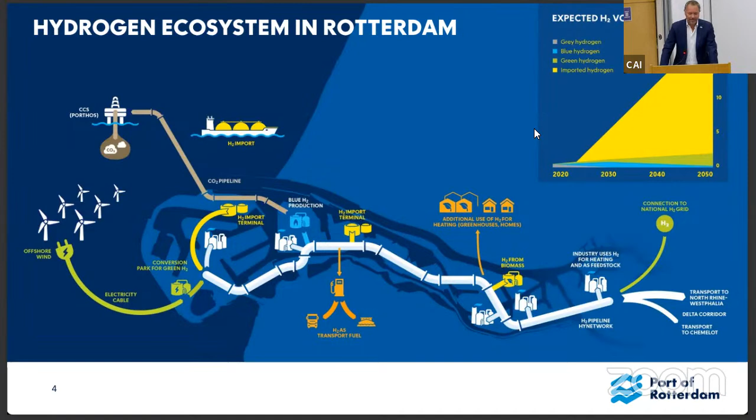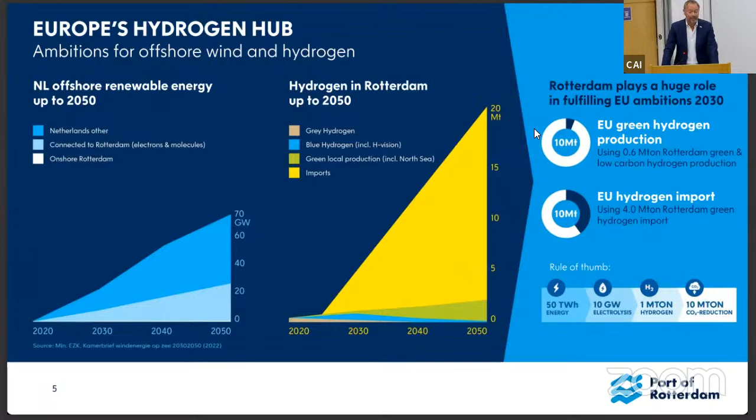Here you see some numbers about that. The EU set a target already that they need 20 million tons of hydrogen in all of the EU in 2030, out of which 10 million tons is imports and 10 million tons is local production. From the local production, with the plans we have, we think we can come up to 0.6 million tons of production of green and blue hydrogen. But for the imports, we think that 4 million tons of hydrogen needs to be imported already in 2030. Next slide, please.

Here you can see this is all fueled by the offshore wind that we have in the North Sea, in the Netherlands. Some of it is already under construction. We plan to have 20 gigawatts of offshore wind parks ready in 2030, out of which 7 gigawatts will land at Rotterdam, at our port, where we simply have extensive grids. Because currently there are also some coal-fired plants there, and we are one of the places where there's easy access to the grid for offshore cables.

Very important that we need this green electricity to decarbonize our port. And also, as it probably will be too much electricity to transport all over the grid, part of it needs to be transferred into hydrogen directly at the shore, so in our ports, so that it doesn't all need to be put on the grid. Next slide, please.

Here is an example that I want to give you, specifically the hydrogen conversion park that we're currently building. We already had some parties that came to us 4 years ago, companies like Shell, BP, and Air Liquide, companies that already have a footprint in the Port of Rotterdam. They're already using hydrogen, and they wanted to invest in green hydrogen production. As I said, the only problem is that this requires huge investments in infrastructure and also location. And they came to the conclusion they could not do it on their own premises.

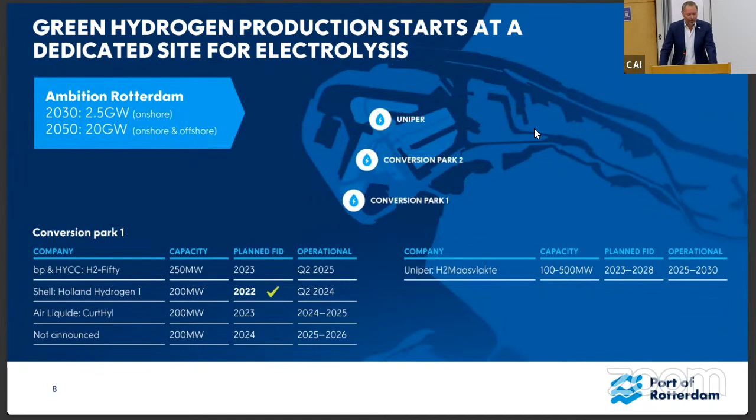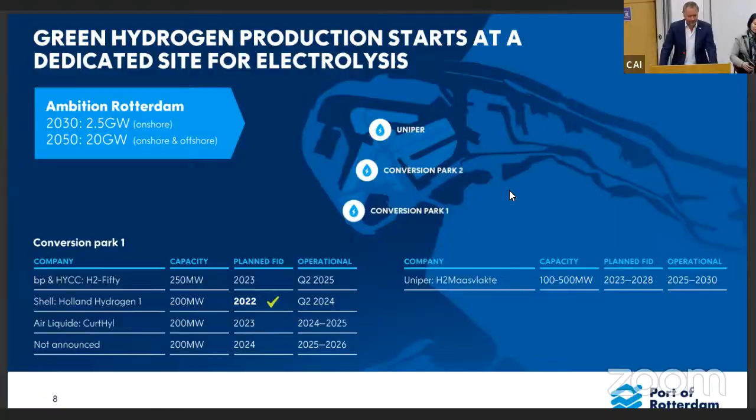The market is not ready yet. Nobody knows what the prices will be. Nobody knows what the offtake will be. So it's good that some parties, let's say the front runners, come up with these kind of estimates. Next slide, please.

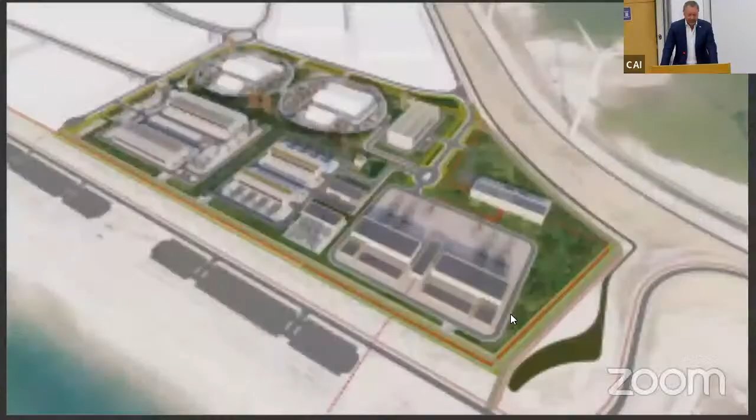And here you see the whole hydrogen conversion park as I just envisaged, and let me explain to you how it will look around 2028, 29 when it's ready. In the upper corner you see the Shell refinery, and you see in total four electrolyzers. In the bottom right corner, there will be a DC-AC connection from an offshore wind park that will connect there to the grid,

for which there will also be a dedicated substation. And we even incorporated here the possibility to use the waste heat of the electrolyzers, which we can then use at a different location for heating buildings, even the horticulture environment.

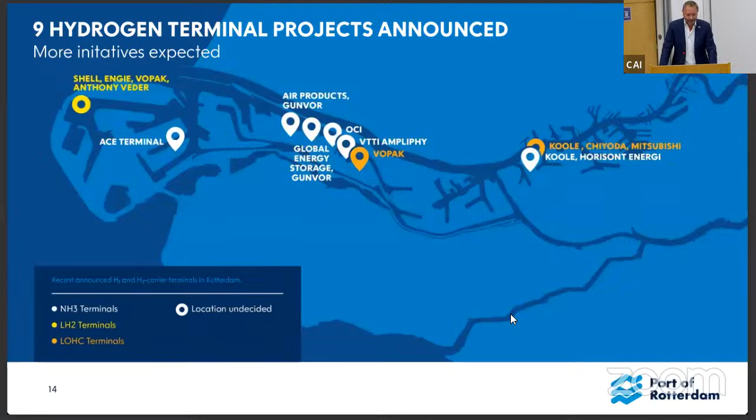We have a big ecosystem in ports, with multiple import and export terminals currently used mainly for all kinds of liquid bulk fossil fuels, but almost all of them are in transition, or new facilities are being built, to also receive ammonia and other derivatives. One of them, OCI, already has an existing ammonia terminal that we have imported through, based on grey ammonia, imported for the fertilizer industry. This proves that we are already importing and exporting hydrogen-related products for many years, so we know it can be done safely, but a lot of future investment needs to be done.

Now, one important aspect is the cracking of ammonia. We know huge volumes will come to the port in the form of ammonia. Some will be used directly as ammonia - people talk about Germany using ammonia directly in power plants, but also ammonia as a bunker fuel is more and more focused on. But we know the main part will have to be cracked.

This is existing technology, only on a smaller scale. Some terminals are working on having ammonia crackers on their own premises. But at the port we said, let's look at the challenge and do an investigation - if everyone comes together, maybe you need to invest in a very large open access ammonia cracker that local terminals can use. So that's one of the initiatives we're currently working on, to possibly have a big open access ammonia cracker.

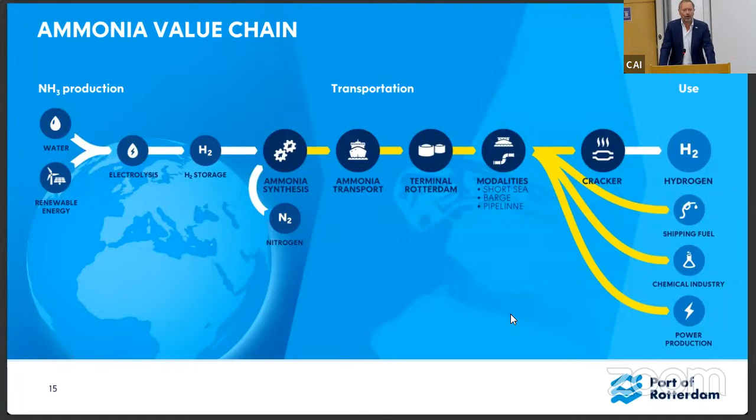Here's an overview of all the hydrogen initiatives we have in our ports, which includes a lot of hydrogen terminals and local production of green hydrogen. We also have some parties that want to build electrolyzers in our ports - one of them is called Battolyser, an innovative Dutch party. And of course, all kinds of infrastructure to support hydrogen.

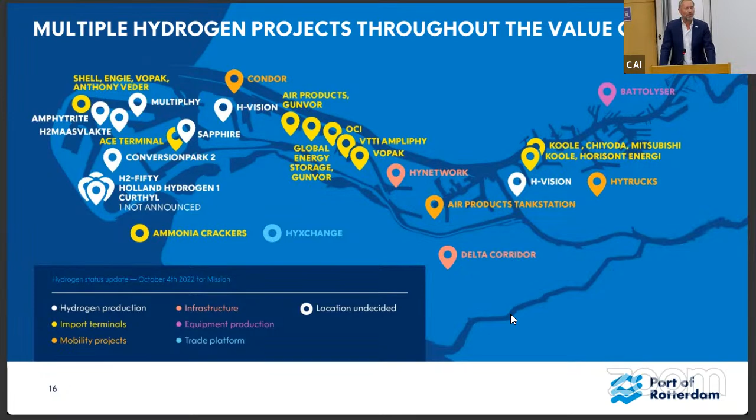Also worth mentioning is hydrogen fueling stations, and trucking - we think hydrogen will still play an important role in decarbonizing trucks. We're mainly getting electric trucks and hydrogen fuel trucks, mainly looking at weight and long distance. Hydrogen will also be for mobility.

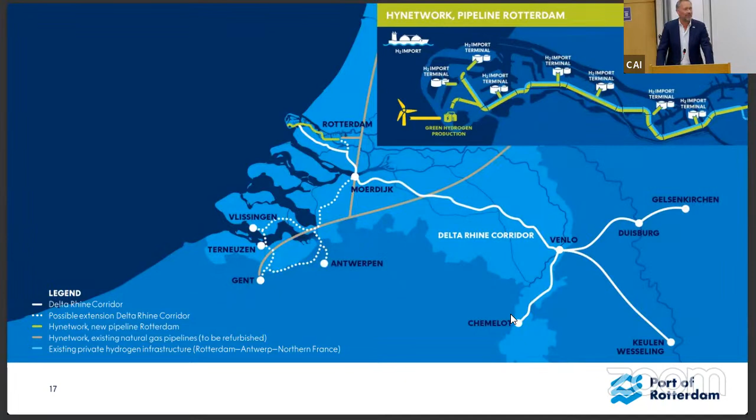The infrastructure is also a very important part. We start with the hydrogen backbone in our ports, the first 4 kilometers. FID for that has already been taken, to be built by Gasunie - construction actually started last Friday, with a big inauguration done by our King. This will be the first part of the complete hydrogen network in the Netherlands, which will later be connected to the international hydrogen backbone, and in our case mainly with the connection to Germany.

So what's necessary to make this happen? Of course, fast and reliable permitting is very important. Also, things like ammonia and hydrogen are not new, but on a different scale, so it's important to do that properly without slowing down initiatives. Certification is important - we already know the EU has quite strict regulation on what we call green hydrogen import. That's quite complex regulation which is still not 100% clear, but it's important that it becomes clear quickly what this means for your project for hydrogen to Europe.

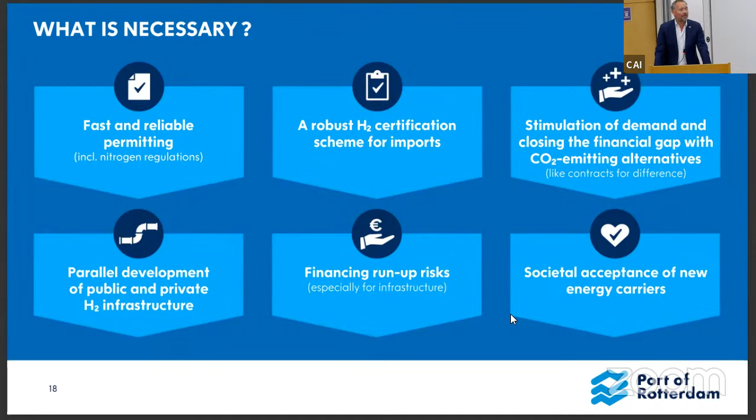As I said, I have some more pictures and slides of things I want to show you, which is in the slide deck that I will send to you later. You're always welcome to come to Rotterdam if you have the chance. You can see that really things are happening in that port. One thing I've mentioned is in May we will have the World Hydrogen Summit in Rotterdam, which is one of the biggest conferences in the world. So all of you will be invited to come there next year. And then I think we'll be at the last slide.

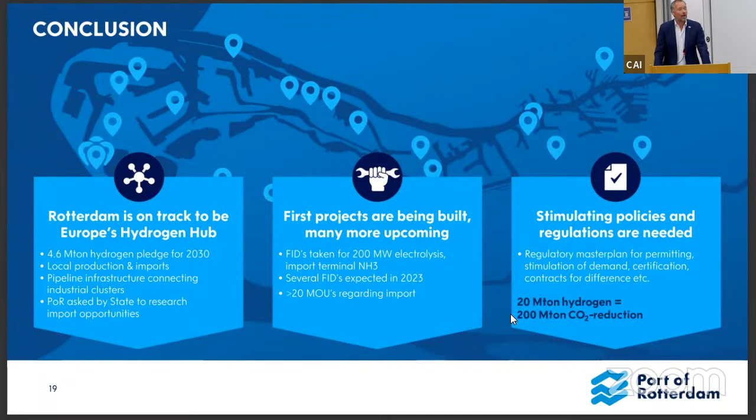So this was the last slide of my presentation. I have no idea how I did on time, but hopefully there is still some room for questions.

So you will have the chance to ask all the questions you want to raise at the last part of the session, starting around 11 p.m. And thanks, Eric, for your kind presentation. It's impressive to see what Rotterdam is doing to convert themselves into the European hub of hydrogen.

Now I'm going to introduce Joost de Ruijter. Joost, I will introduce you in Spanish. I think you are connected now. Yes, you're there. Joost is...

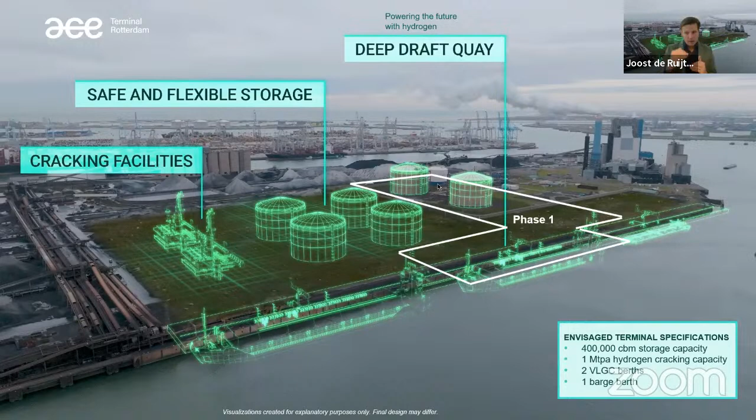So the two phases again. Phase one is quite simple: two existing tanks, one berth for VLGC size vessels, and based on the two existing tanks, a storage capacity of 67,000 cubic meters. It's an ammonia-only facility, meaning we focus for phase one on existing ammonia players. Ammonia is now used predominantly in the fertilizer industry and the chemical industry.

Those companies currently produce their own ammonia based on natural gas, so it's very carbon intensive. It's a very low-hanging fruit to exchange that gray ammonia for green imported ammonia, for example from Latin American countries. In phase two, we'll have additional capacity for storage of ammonia, but also cracking. That means the focus for phase two will be mainly on hydrogen off-takers. But still, we expect that roughly 25% of the incoming ammonia will not be cracked, but will also be used as ammonia as a feedstock.

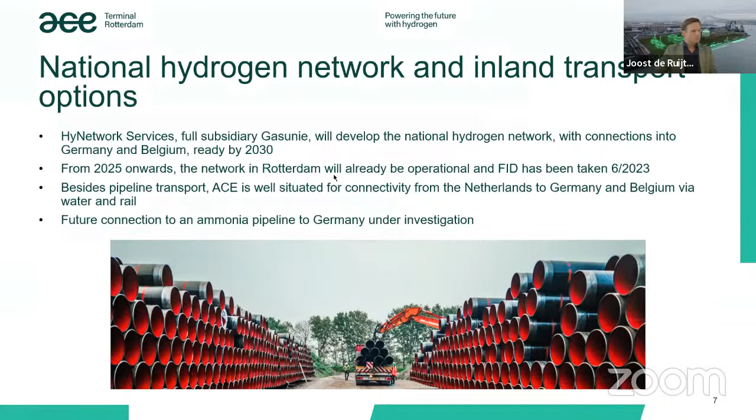So about the hydrogen pipeline. It will also be a phased approach. So Gasunie has now just started the works in the Rotterdam area, but also we will connect the other harbors: the harbor of Amsterdam, the harbor in Zeeland, and the north of the Netherlands will be connected to the hydrogen backbone.

And then in the next phase, there will be a connection from Rotterdam to Germany. And the third phase, we will even have offshore hydrogen pipelines connecting the offshore wind farms that will produce hydrogen at sea, and we will transport the hydrogen from sea to shore. And in the end, 2030 and later, this will be the full network operated by Gasunie. So you see, not only in the Netherlands, but also parts of Germany will all be connected.

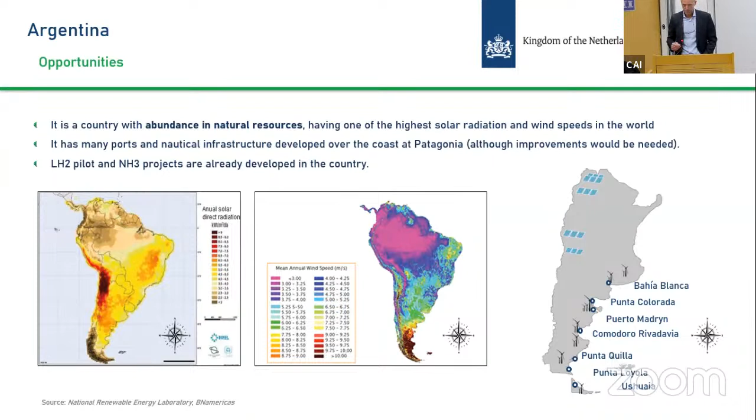Next slide, please. But before Argentina is there, huge infrastructural projects need to be built. About 30 gigawatts of electrolysis capacity, which means 55 gigawatts of renewable electricity generation. That means that the current renewable generation is being multiplied by 11, and the total current electricity generation will be doubled. The focus will be on wind in the southern part and solar in the northern part.